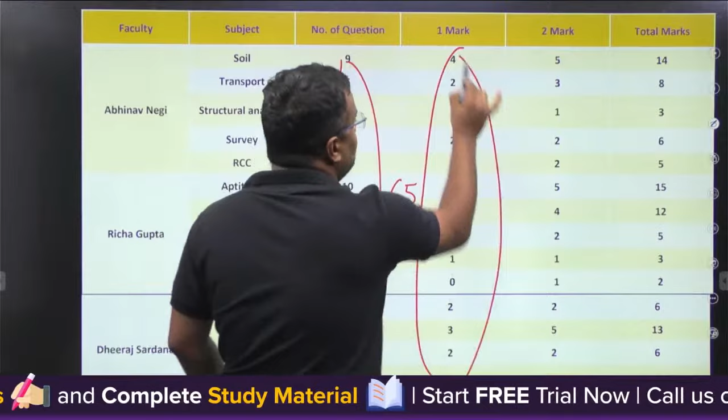Now, coming back to this mock test, guys, total number of questions, if you add, this will be 65 questions. Total number of 1 mark questions, if you add, it will be 30 questions. Total number of 2 marks questions, if you add, there will be 35 questions. And total marks, obviously, will be 100 marks. Aptitude, maths, FM, SOM, irrigation, everything will be there. First, I will be coming, doing soil, transport, structural analysis, survey, RCC. Of course, the weightage of these subjects is exactly the same as that is coming from last many years.

Then Richa will be coming for aptitude, environment, hydrology, irrigation with almost the same weightage as in the GATE examination. And then Dheeraj sir will be coming with strength of materials, mathematics, FM and engineering mechanics. Okay, so guys, be ready with copy and pen and evaluate yourself.

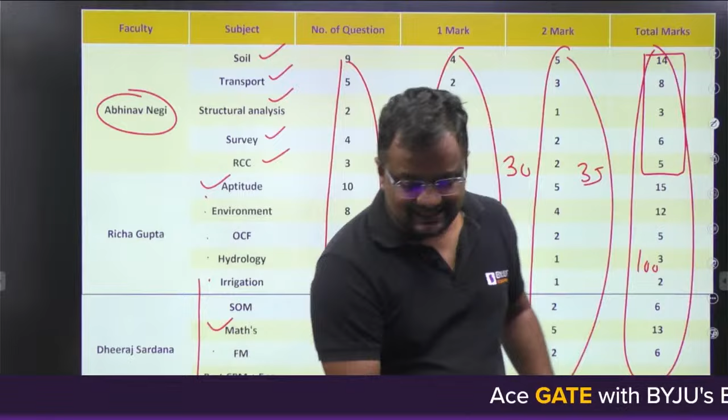Everybody, copy, calculator, pen nikal lena bhai. Copy, calculator, pen nikal lena, so that you can evaluate yourself.

Okay, this is the first question of soil mechanics of 2 marks. First, I'll be taking soil mechanics. I'll be taking total 9 questions, out of which 4 questions of 1 mark and 5 questions of 2 marks. As from last 2 years in GATE examination, 1 mark and 2 marks questions are jumbled up. Earlier in my time, 1 mark questions in a single go, and then 2 marks questions in a single go. But from last 2 years, 1 and 2 marks questions are jumbled up, in the same format I have taken in this test as well.

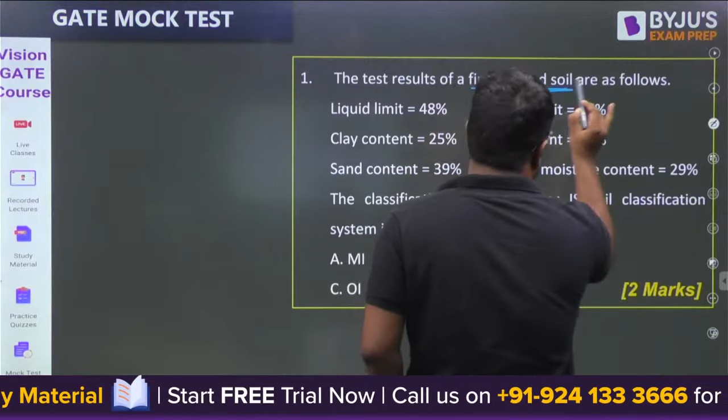There is a fine grained soil. Question number 1, guys. First, I'll be taking soil mechanics. This is a 2 marks question. Nothing is written. It will be MCQ. In actual examination, they will be telling you that this is MSQ, this is MCQ or NAT. Hide and seek they will not be playing.

Now, this is a fine grained soil. That means the answer will be either Cl, Ci, Ch, Ml, Mi or Mh. Answer will be either of these. Evaluate yourself, guys. Okay. Now, from here, we have to find the classification of soil.

Now, what is the liquid limit? It is 48%. So, when liquid limit is less than 35%, even less than 20%, that will be low compressible. Liquid limit from 35 to 50 is intermediate compressible. Liquid limit greater than 50 is high compressible. So here liquid limit is 48%. That is coming in this. So it is intermediate compressible.

So this cannot be the answer. So now two options are there: either the answer will be Mi or Ci. Yes, the option can be Oi also. But for Oi, they have to give some different data like soil is dark in color, or the weight of the soil is significantly lost after removal of water content. That is not written. That means organic will not be there. Then in that case, if the answer comes below the plasticity line, we will take it Mi.

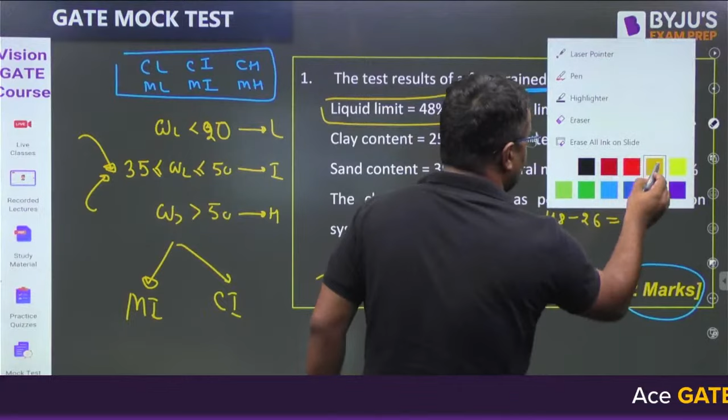Now, what is IP of soil? IP is WL minus WP. It is 48 minus 26%. So that is 22%. 22% means 0.22.

Now there is an A line, as you know. If I make a graph of IP and liquid limit, there is an A line. The equation of A line is IP is equal to 0.73 (WL minus 20). What is liquid limit? 48 minus 20. So this will be 28 into 0.73. What is this value?

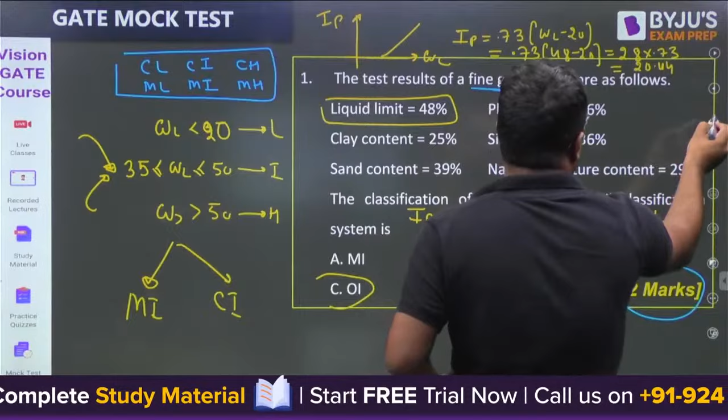What is this value? 28 into 0.73. 20.44. So this value is 20.44.

That means the value on the A line is 20.44, and what is our IP? Our IP is 22%. So our IP is greater than 20.44. So it will be clay. Ci. It will be Ci.

Why is above clay and below silt? Because clay has a higher IP value on the y-axis; clay is more plastic. So that is why the above points are clay and below is silt. Give me yes or no, guys.

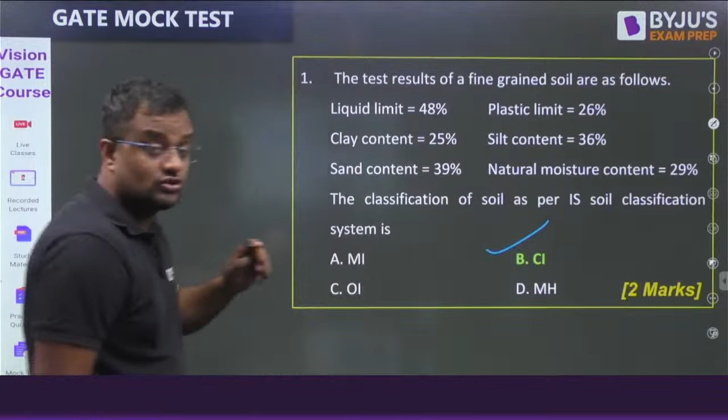One question is done. Okay, in soil, total 9 questions we have to do. The questions will be exactly as per GATE pattern. Okay, now the consistency index.

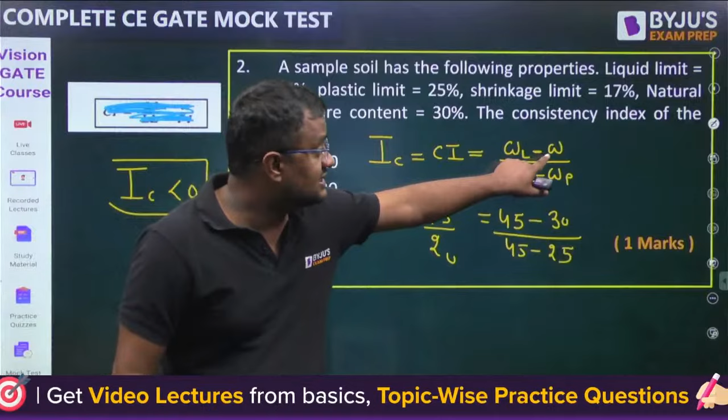Now, what is the significance of consistency index? Suppose somebody reports that IC is less than 0. That means the soil is in a very liquid state, negligible shear strength. Because if IC is less than 0, the numerator is negative, since the denominator can't be negative; WL is always greater than WP. That means W is more than WL. So natural water content is more than liquid limit, the soil is in liquid state, negligible shear strength.

Okay. Chalo, everyone. Question number 3.

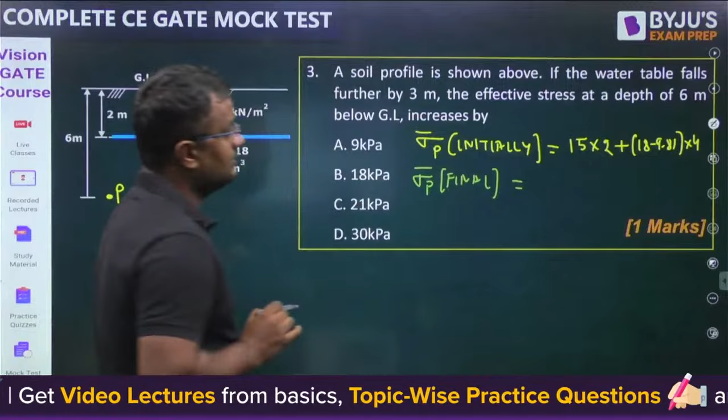Gamma W is not given, na? Gamma W is not given, so we have to take it 9.81. Okay, whenever it is not given, we have to take 9.81. For how much meter? For 4 meters. And sigma bar P final when the water table drops. Okay, when the water table drops further by 3 meter, water table comes here.

Then for 5 meter it is 15. So 15 is not for 2 meters now, 15 is for 5 meters. Okay, and gamma submerged, 18 minus 9.81, for how much? 5 is here, so 1 is left, into 1. What is the difference coming, guys? Everybody. 21 kilopascal to be precise. Approximately this much will be coming. Yes or no? Tell quickly.

Let us go to question number 4, guys. 2 mark question. Come on. I have taken not very tough questions. Whatever the mock tests, whatever the GATE practice sessions I have taken ever, this one is one of the easiest, guys. Come on. So, tell me. Okay, what is the value?

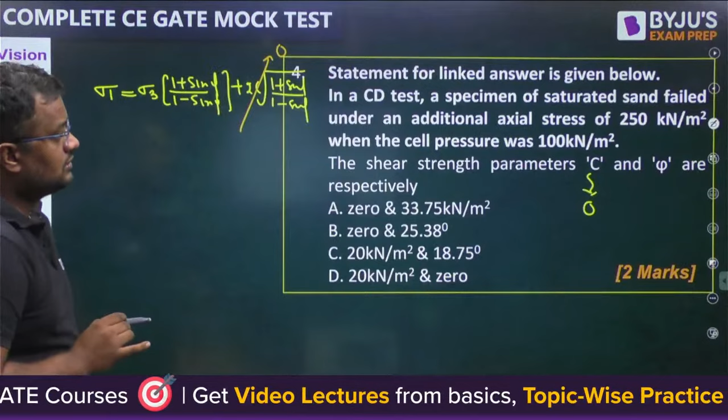Sigma 1 is equal to sigma 3 into (1 plus sin phi)/(1 minus sin phi) plus 2c root of (1 plus sin phi)/(1 minus sin phi). Now, whenever it is written that it is sand and nothing is mentioned, c will be 0. So this is 0. Now, the sigma 1 value is 250 plus 100, that is 350. Sigma 3, the cell pressure, is 100.

One equation, one unknown. You can find the value of phi. So this is 0 and 33.75. Good, Sagar. Excellent. Hydrology? Okay, brother, hydrology, irrigation, all subjects are these?

Now question number 5. They are asking the relative density. The relative density Dr, also called ID or RD, generally the students know this formula: e max minus e upon e max minus e min. Now, gamma d is equal to G gamma w upon 1 plus e. When e is maximum, maximum voids, gamma d is minimum.

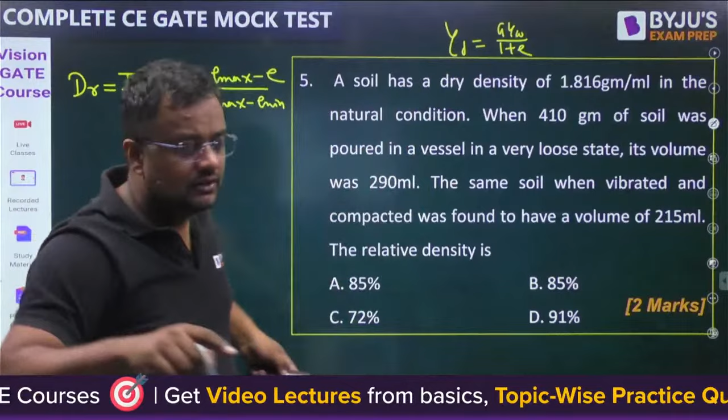So if you find e from here, e is G gamma w upon gamma d, minus 1. When e is maximum, gamma d is minimum. So minus 1 will be cancelled out, and G gamma w will cancel out. So when it is maximum void ratio, dry density is minimum: 1 upon gamma d minimum. And when there is minimum void ratio, gamma d is maximum. This is relative density.

Now let us find out the value of gamma d. So soil has a dry density, this gamma d is obviously 1.816. In the loosest state, that means gamma d minimum, the weight is 410 by volume 290. And gamma d maximum in the densest state, compacted, weight will be same, 410 by 215.

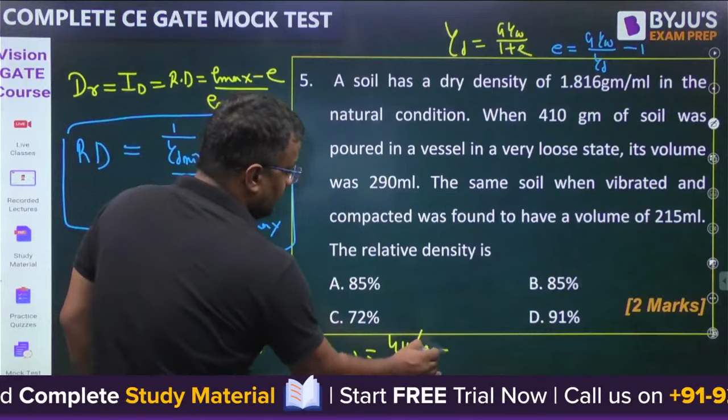Now you know all the values. So putting all these values here, what you are getting, can you please let me know in the comment section, guys? From putting all these values, you are getting A, 85%.

And what is the physical meaning of relative density? e max minus e natural upon e max minus e min. If e is less, relative density is more. That means if a soil has a larger relative density, it is densely packed, voids are less.

Okay, let us do question number 6. Come on. Again, one more question of fine grains, one more question of soil classification, guys. Come on, give a try, everyone.

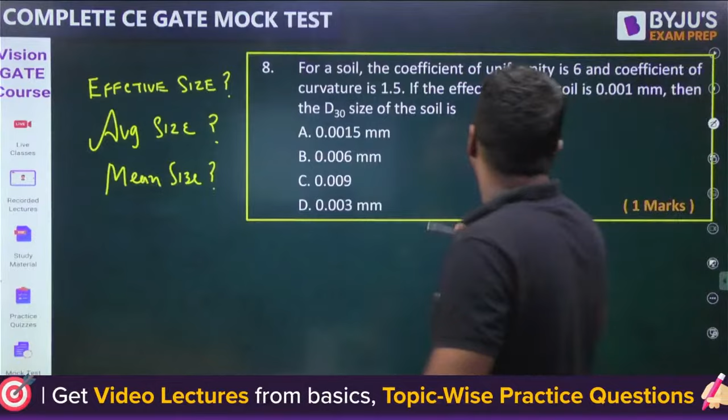Okay, CU is 6, is equal to D60 by D10, and the value of CC is equal to 1.5, is equal to D30 square upon D60 into D10. Two equations, two unknowns. Okay, from 1 and 2. No, not two unknowns.

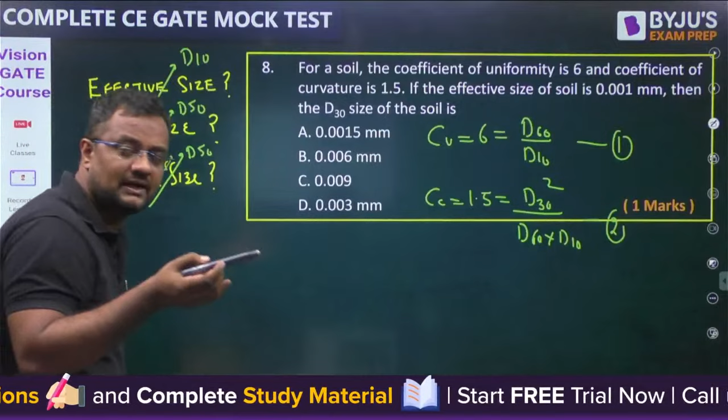Effective size is D10. Average size, if somebody has written it, is D50. And mean size is also D50. D10 means the diameter below which 10% of particles are there. D50 means the diameter below which 50% of particles are there. So D10 is known, 0.001. So from here, two equations and two unknowns. We can find D60 and D30 from here.

Yes Sagar, C is not coming, yes, 0.003 is coming. Sagar, please check your calculations. Okay. Ninth question of 2 marks.

Two samples of normally consolidated clay, NCC. Are you remembering something from NCC? Not the NCC cadet, related to soil only. What is NCC? For NCC, it behaves like a sand. C is negligible, so we take C equal to 0.

Okay, so the common tangent is going from the origin. Now, sigma 1 is equal to sigma 3 into (1 plus sin phi)/(1 minus sin phi) plus 0; that term will be 0. Let me write that equation for this orange Mohr circle. For the orange Mohr circle, this is 12, this is 7, (1 plus sin phi)/(1 minus sin phi). Find phi from here. One equation, one unknown. Then apply that phi for the green Mohr circle.

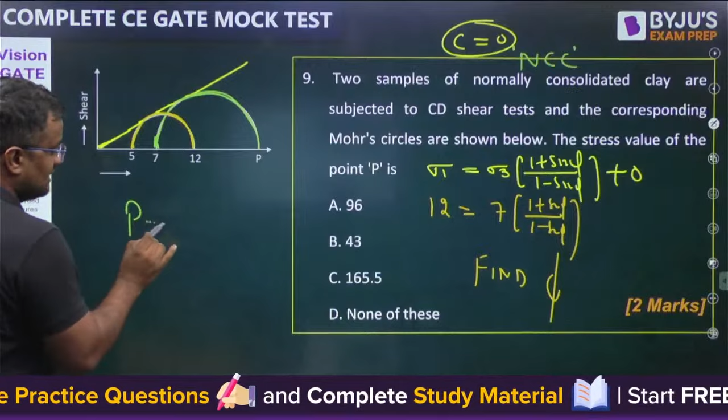For the green Mohr circle, sigma 1 is P. This is 7. No, sigma 1 is 12 and that is 5 for that. Now here P is equal to 7 into (1 plus sin phi)/(1 minus sin phi). Put phi here and find P. Have you understood? I guess none of these will be coming.

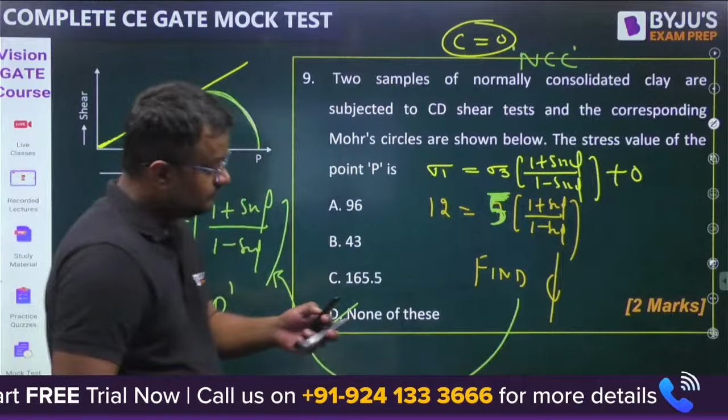Okay, guys. So these were the questions of soil mechanics. Now let us move. Then Richa ma'am will be coming, Dheeraj sir will be coming. Let us move to the next subject, that is surveying. In surveying, we'll be doing 1 question of 2 marks and 2 questions. Okay, let us go there.

Chalo. Tell me. Evaluate yourself, guys. Quickly. Okay, the magnetic bearing is 178 degrees, but at noon the true bearing is 180 degrees. And the magnetic bearing is 178 degrees. Therefore, clearly, declination is 2 degrees east. You are measuring from east, only then will you be measuring less.

So now the magnetic bearing is 72 degrees 40 minutes. So you are measuring the magnetic bearing less, right? Suppose you don't know the declination, you don't know local attraction, nothing.

Now I'm giving the answer without using the word declination. True bearing is 180, you are measuring 178 degrees. So you are measuring 2 degrees less. Now the magnetic bearing is 72 degrees 40 minutes. So the magnetic bearing is 2 degrees less, na? So this is also 2 degrees less. So the real value will be 74 degrees 40 minutes. This simple, without using the word declination, I have solved.

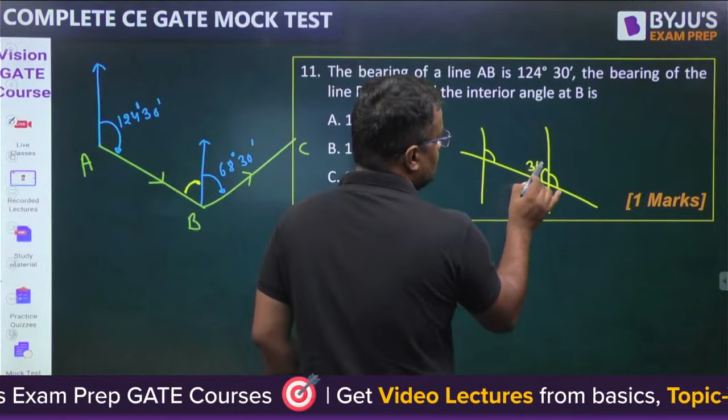Guys, what will be this angle? This yellow angle? 180 minus this? Come on, yaar. If two lines are parallel, this is 150, this is 30, so the sum of these two is 180. So this angle should be the supplement from 180. So subtract 124 from 180: 55 degrees 30 minutes. 55 degrees 30 minutes. Give me yes or no.

Now the interior angle asked is this angle. So 55 plus 68. 60 plus 50, 110. 110 and 118. 123, 124. 124 degrees. C option.

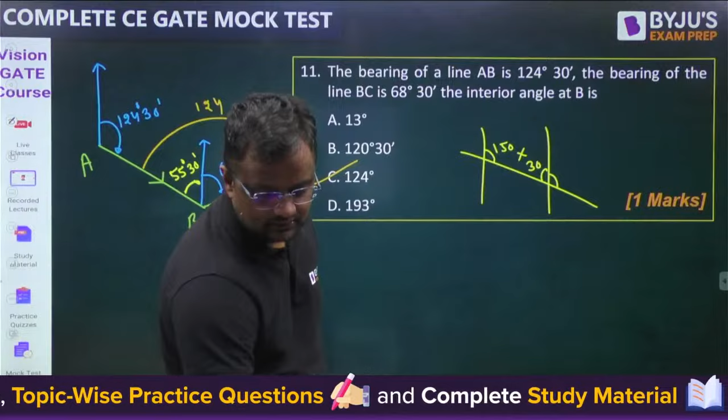Okay. Now the 12th question. This is an MSQ, guys. Keep in mind this is an MSQ. Now, suppose here is a river in between. So we cannot put the leveling instrument in the middle of backsight and foresight. So this is point A. Data is not given, so I am giving you the data in terms of a figure. Don't worry.

Please see. When the instrument was near A, the reading here is 1.625 and the reading here is 2.545. This is X1 and this is Y1. Now, when the instrument is near B, the reading is 1.405, that is Y2, and here it is 0.725. This is X2. So 1.625, 2.545, and when it is here, 1.405 and 0.725.

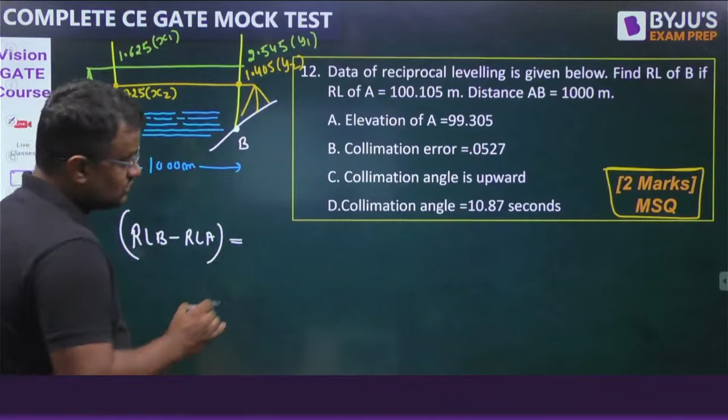Now, the distance between them is 1000. Guys, from this one question, all concepts of reciprocal leveling will be cleared. Now, RLB minus RLA is equal to (X1 minus Y1 plus X2 minus Y2) by 2. What is the RL of A? 100.105. X1, X2, Y1, Y2 are given. From here, RLB is exactly 99.305 meter. So option A is correct. Now let me move to option B.

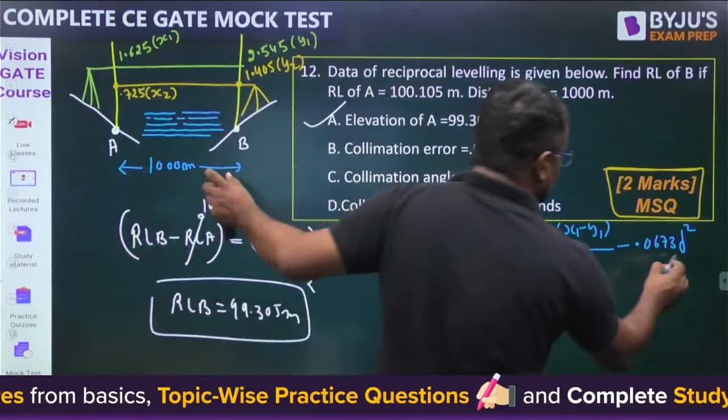What is the error due to collimation? I am not going into derivation. This is (X2 minus Y2 minus (X1 minus Y1)) by 2 minus 0.0673 D square. D is in kilometers, so 1000 meter means D is equal to 1. From here the error of collimation you get is 0.0527, positive. And error due to collimation positive means upward.

Why upward? Let me tell you. Suppose this is the instrument, this is the staff, this is the true value, and you are measuring above. Collimation error is above, so you are measuring more. Error is measured value minus true value, so this is positive. Whenever it comes positive, it's upward collimation error. Whenever this value comes negative, it is downward collimation error.

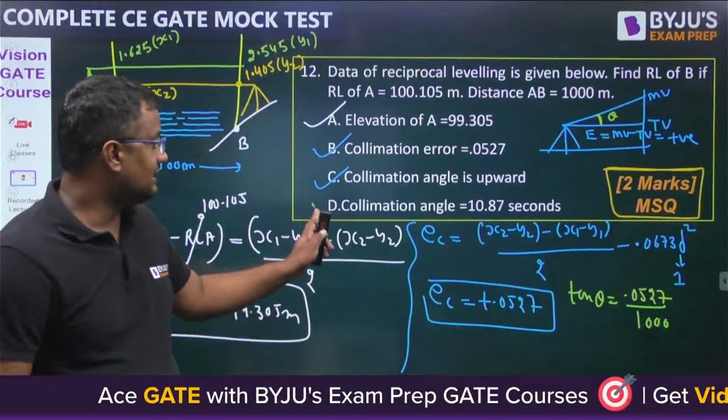So the collimation angle is 10.87 seconds. Let me check this. This theta: tan theta is equal to perpendicular by base. This error, 0.0527 divided by 1000. So theta is 10.87 seconds. So with a single question, guys, we have solved the complete collimation error, all the parts of reciprocal leveling that could come. Got it? Now after this, do this.

Let's do a question based on omitted measurement. What is the latitude of AB? It is L cos theta, and when values are in whole circle bearing, positive negative takes care of itself automatically. So it is 30 into cos 60.5 degree.

What is the departure of AB? It is 30 into sine 60.5 degree. Moving forward, latitude of BC is equal to 120 into cos 300. What is the departure of BC? It is 120 into sine 300.

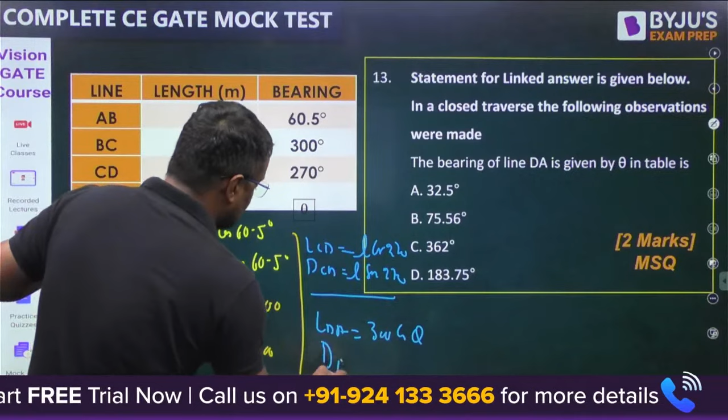Similarly, what is the latitude of CD? It is 120, L cos 270. What is the departure of CD? It is L sine 270. Similarly, what is the latitude of DA? It is equal to 300 cos theta. And what is the departure of DA? It is equal to 300 into sine theta.

Now, as from A we are coming back again to A, summation latitude is 0 and summation departure is 0. Two equations, two unknowns, L and theta. From here the value you get is for theta, and length also you can check - length is equal to 212.7. You can verify it later. Got it, everyone? Please tell me.

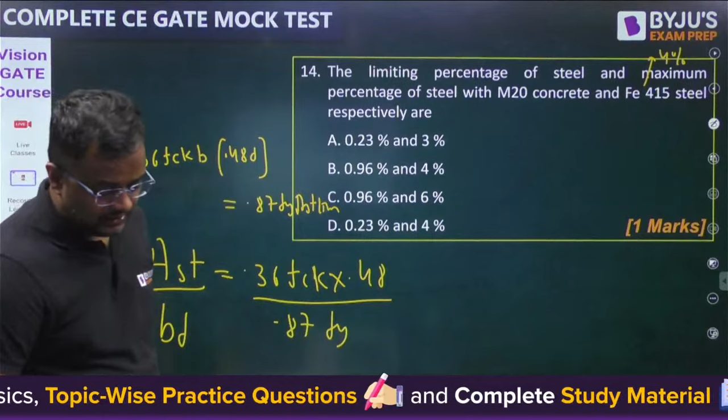Got it everyone? Okay, now question 15, which is MSQ. Which of the following statements are true for an over-reinforced beam? It is a primary compression failure - when steel is provided too much in tension, why would tension failure occur? It will fail from the compression side because in tension we have provided a lot of reinforcement.

These have large curvature compared to under-reinforced sections. This generally occurs, particularly if you see the formula of working stress method, it can take a large bending moment - why would large curvature come otherwise? Now it can take more - this is not failing from the tension side, right? It can take more bending moment.

Yes, according to WSM, the moment of resistance of under-reinforced is less than the moment of resistance of balanced section, then the moment of resistance for over-reinforced section will be the highest. Being subjected to brittle and sudden failure, not recommended - yes, as per IS 456, brittle failure should not be there. So options A, C, D we have already covered.

Question number 16, chalo batao - tell me quickly. What is the MU limiting formula? MU limiting formula is 0.138 FCK into BD square. 0.138 into FCK is 15, BD square is 200 into 300 square, that will be 37.26.

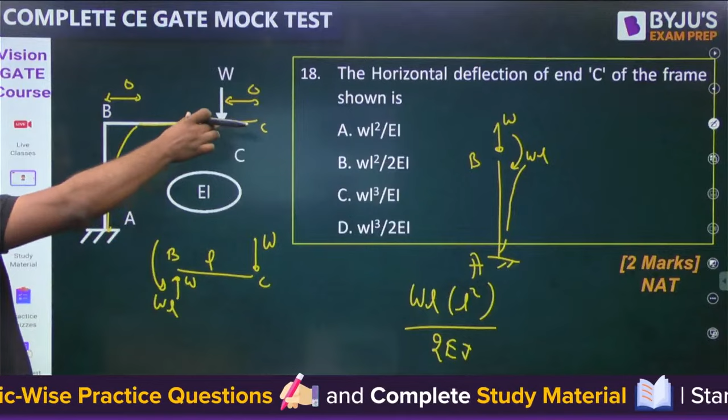So M into L square by 2EI, and whatever AB will be going here, the same amount BC will be going here - if this amount is delta, then this will also be going by delta amount here. अगर यहां पे theta एक और आता तो हम theta into L भी add करते उसमें, but here theta is 0. So from here WL and WL cube by 2EI, WL cube by 2EI.

Okay, now guys let us move to the next, jल्दी से बता दो.

Okay, the average headway is 3 seconds - the longitudinal distance, if the distance between the two vehicles in terms of time is 3 seconds, then what is the distance between them in terms of space? That is 80 into 5 by 18 into 3. If at one section one vehicle is going and another vehicle is coming after 3 seconds, then the distance between them is 80 into 5 by 18 into 3. What is the value? जल्दी से बता दो.

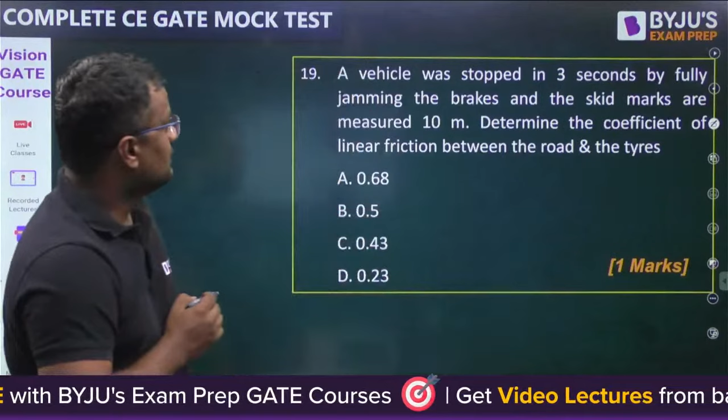19वें में coefficient of friction बताना है, द skid marks आपके पास दे रखे हैं. A vehicle was stopped in 3 seconds by fully jamming a brake and skid marks was this. So guys, you know this, v square minus u square is equal to 2as. Fully stopped, so finally 0. So u square you have to find out, initial speed is not known, a is known. So u square is equal to a is minus mu g into the distance, skid mark is 10 meter.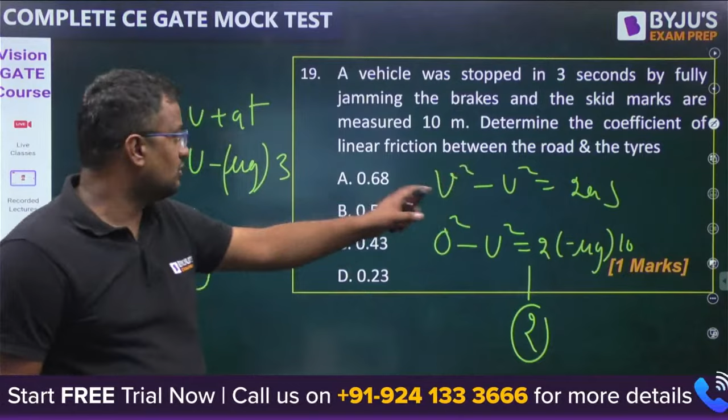And one more formula, v is equal to u plus at. So for v is equal to 0, u is equal to initial speed we don't know, a is minus mu g into time, time is how much? 3 seconds. So two equations, two unknowns - one equation is mu, u initial speed and mu is unknown, and second equation is this. Two equations, two unknowns you can find out. Otherwise वो फॉर्मूला भी होता है, यहां से u निकाल के वहां रख दो तो ये फॉर्मूला भी आता है, जो भी आपके पास आता है derive में कर सकता हूं, उसमें जा नहीं रहा अभी.

ओके 21 जल्दी से बता दो. 21 में आपके पास एक vehicle ऐसे है, उसका speed कुछ दे रखा है और उसको दूसरी vehicle को overtake करना है on a 2-lane unidirectional highway with design speed 60 km per hour, with the acceleration of 3.6 wants to overtake a slow moving vehicle. इसका 40 है, इसका 60 है, तो OSD हो जाएगा D1 plus D2 plus D3, but D3 will be 0 because D3 is the distance of the vehicle which is coming from opposite end. Okay, so that will be D1 plus D2 because these are 2-lane unidirectional, unidirectional means D3 will be 0.

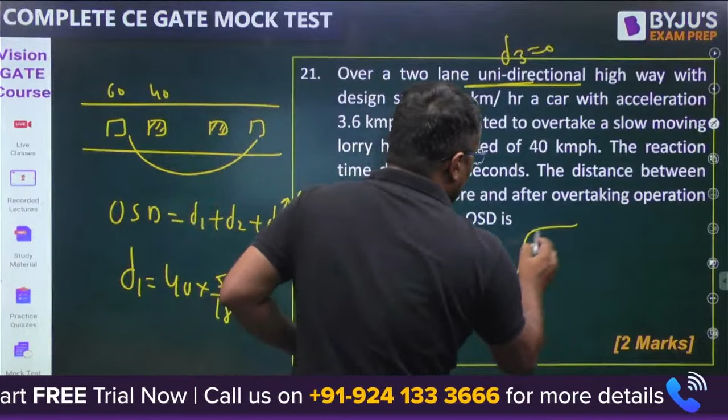ओके, सो D1 कितना होगा? हम मानते हैं कि 2 सेकंड तक वो overtake ही नहीं कर रहा है, उसी की speed चल रहा है - 40 into 5/18 into 2 seconds, 2 seconds तक वो देख रहा है overtake करूं ना करूं, 2 seconds हमको मानना ही मानना होता है. और D2 तब होता है जब वो accelerate करके यहां आ जाता है - या तो उसकी speed 20 into t plus 2s निकाल लो, otherwise अगर formula से चलना है तो 4s/a करो. ओके, s कितना है? 4 into 20 by a.

4 into 20 by a, what is acceleration? कहां गया? 4 into 20. अच्छा, acceleration ये दे रखा है 3.6 किलोमीटर पर सेकेंड, उसको आप units में निकाल लोगे तो वहां से आपके पास जो t की value मैंने घर पे निकाली थी that was 8.94. Okay, that was 8.94. Now what will be d2?

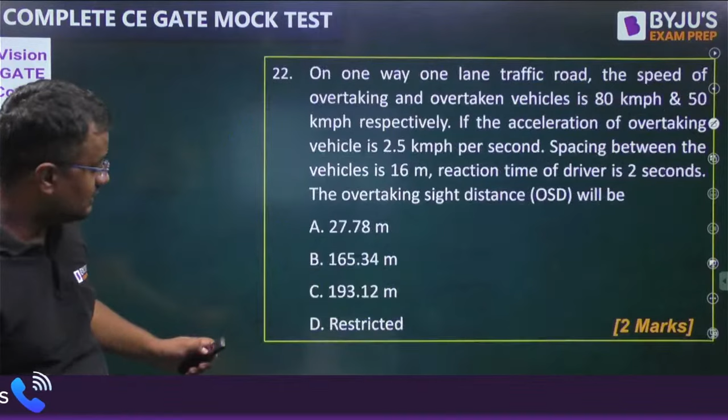ut plus half at square. U is 40 into 5/18 initial speed - before overtaking that was the speed running. T is 8.94 plus half acceleration into t square. When you add, you will get the answer as 161.10.

Okay, now this question, guys, I have not taken the same OSD question if you are thinking. Here the answer will be restricted. This is a one way, one lane traffic question - this is a new question that I have made myself. So in one lane traffic, how will overtaking be allowed? That is restricted there.

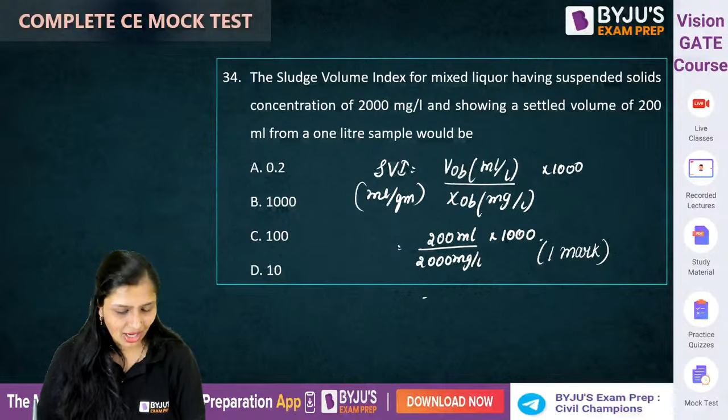So how much volume is settled? 200 ml. How much was the concentration of the solids? 2000 mg per liter. So converting mg into grams, divided by 1000. So how much will it be coming? 100. Correct. Got that. Now, question number 35.

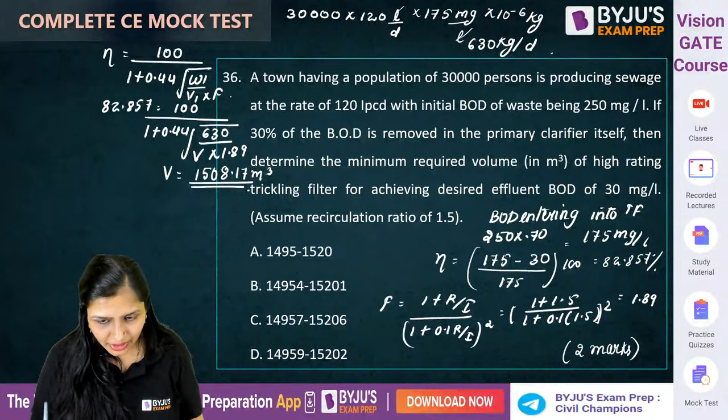Check it out. Every other is 4 digits, 5 digits. It will fall in the range of A, 1495 to 1520. It falls in this range. Got it? Now, question number 37. It is an MSQ. Come on, guys, solve it. I am not going to tell you this one. Quickly. Come on.

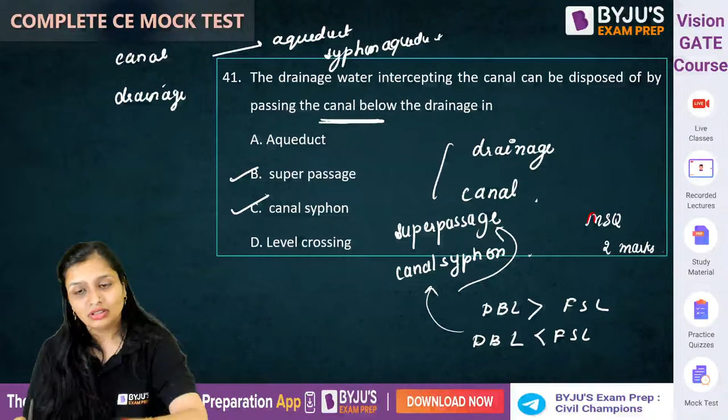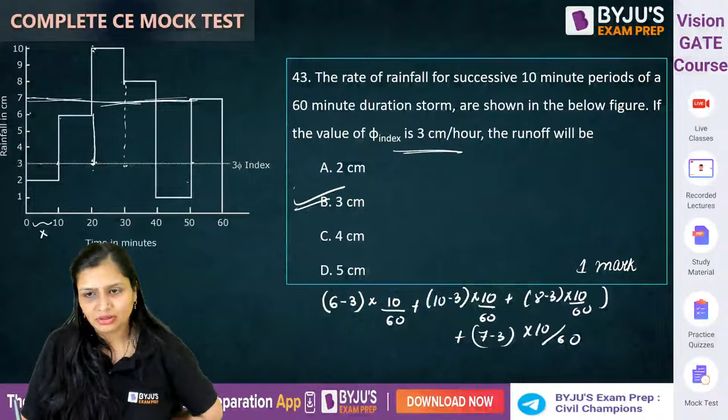चलो, this question, this is a 1 marks MCQ question. इसको ना यहाँ से बनाना थोड़ा ठीक रहता, बट ठीक है. चलो छोड़ो. This one.

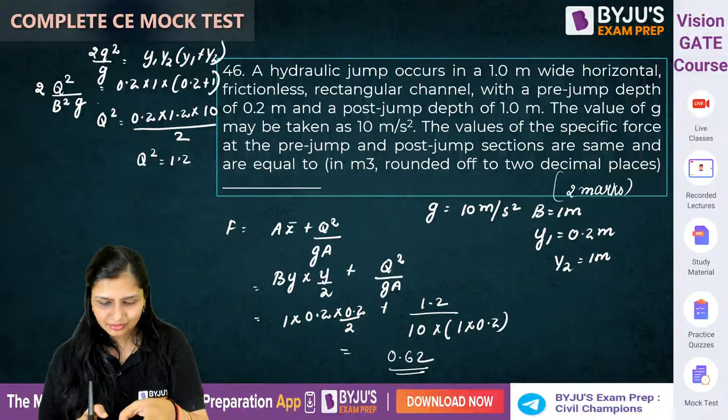Quickly solve this. 0.62. Okay, sir, आप ready है ना? Okay. Point 0.62. Got that? So with this we complete open channel flow, hydrology, irrigation, environment with you guys. And I guess you have got maximum questions correct.

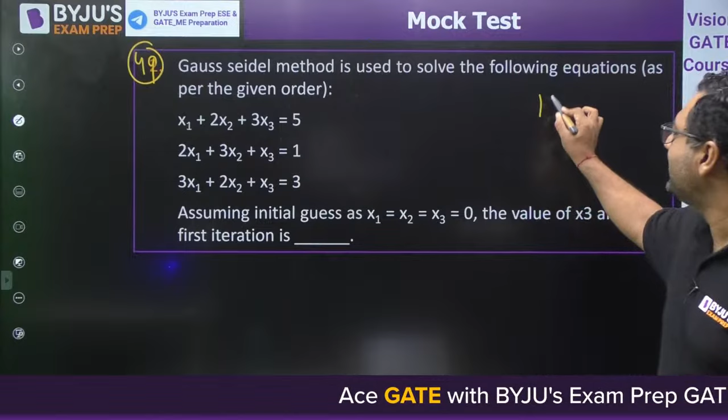So next question is, guys, question number 49. For this question, my dear, this is also a 1 mark question, and this is a numerical answer type. Okay, so 1 mark NAT question is in front of you. This is question number 49. I'm going to solve till 65, and I'm having all mathematics questions, engineering mechanics, PERT-CPM. Okay, so one by one we will see that. Tell me the answer for this question, guys.

This is easy one. Gauss-Seidel method is used to solve the following equations as per the given order: x1 plus 2x2 plus 3x3 is 5. 2x1 plus 3x2 plus x3 is 1. 3x1 plus 2x2 plus x3 is 3. Assuming initial guess as x1 equals x2 equals x3 equals 0, the value of x3 after the first iteration is. So guys, try to solve it.

Otherwise, I am here to help you. If you are feeling any problem, don't worry, I am going to give you the solution. Don't worry about that. Tell me the answer, guys.

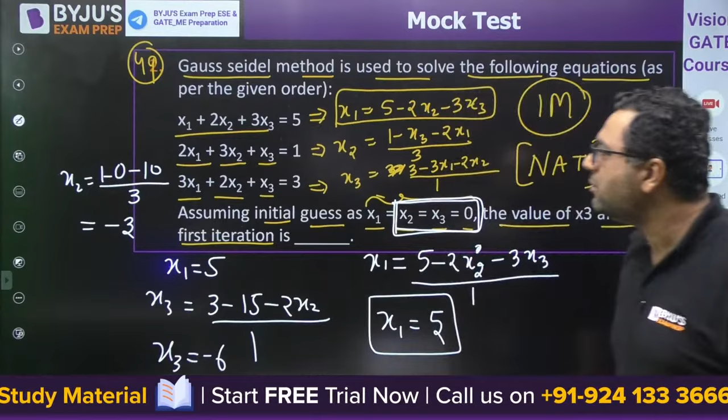Yes Vineet, your answer is correct. So we are going iteration wise: X1 will give you x2, x2 will give you x3, and likewise we will move on. The first iteration value will always be given to us.

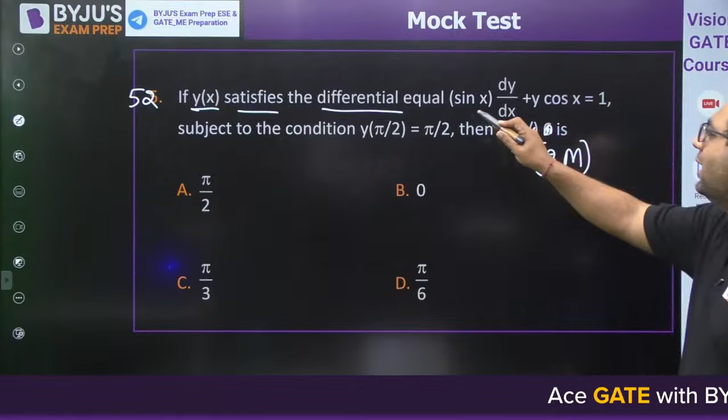And this question is saying y of x satisfies the differential equation, that is sin x dy by dx plus y cos x equals to 1. Then it is saying, subjected to the condition y of pi by 2 equals to pi by 2, then y of pi by 6 will be equals to.

This is a wonderful question. Let us solve it, guys. I am expecting the answer from your side. Just solve it, this is a 2 mark question, question number 52.

And after that, we are having 13 more questions. So just solve it, guys.

Yes, Vineet, what would be the answer for this?

Fine, so guys, just for 1 second the video will be stopped, buffer, don't worry. Yes, Vineet, am I properly audible and visible? So what is the answer according to you? Are you saying B for this question? We will solve it, don't worry.

So guys, this question is actually question number 53. The question is saying sin x dy by dx, plus y cos x is equals to 1. Okay, I feel we move ahead. Question number 53, just let me solve it.

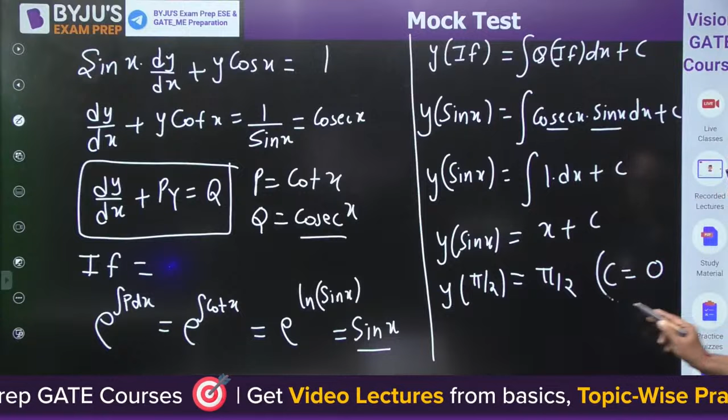Yes. So we will be getting pi by 3. C would be the right answer for this. Once we put y of pi by 2 is pi by 2, you get c to be 0. Putting c to be 0 here, you can find it out. They have mentioned that y of x satisfies this differential equation, y of pi by 2 is this, and you need to find out y of pi by 6. Very good. The answer is pi by 3, that is correct.

One more question we have left behind is this one, an engineering mechanics question. That's why I changed the PPT. By mistake, the wrong PPT was opened. That's why in between I stopped the session.

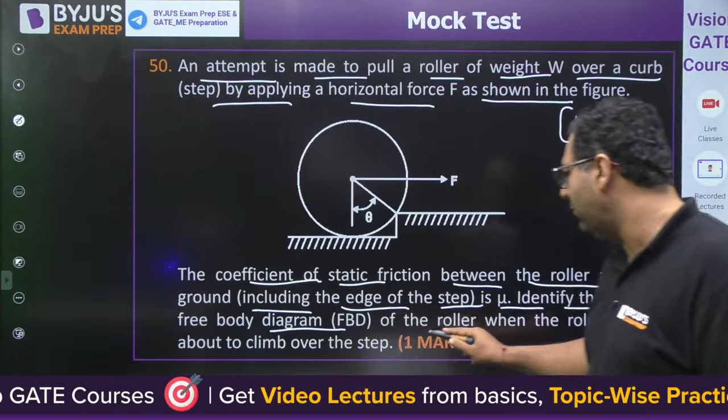An attempt is made to pull a roller of weight W over a curb by applying a horizontal force F as shown in the figure. This is a 1 mark question from engineering mechanics. The coefficient of static friction between the roller and the ground, including the edge of the step, is mu. Identify the correct free body diagram of the roller when the roller is just about to climb over the step.

So my dear, these are the options in front of you. Vineet, which is the correct free body diagram? This is the case when this body is just about to move, just about to cross the step. At that time they are asking you. What would be the right answer? Tell me that.

What would be the right answer?

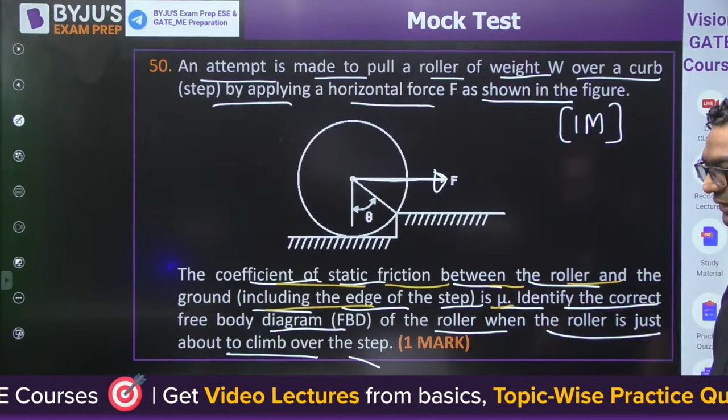As they have given this, my dear, the correct answer will be D, because you will have a friction here and a normal force here. This would be F, this would be W, but there would not be any force at this point. That's why only D is correct. All other options are not correct. Is it clear for everyone? So this is how you will be solving this question.

Moving further to the next question, guys. This is going to be question number 52. We have done it. 53 we have done it. 54, this is once again from probability. And this question is for 2 marks, because I already told you we have the complete 100 marks paper, 65 questions. Now what about this question?

As per the past record of India and Pakistan cricket matches, the winning ratio is 5:2. Find out the odds in favor of India's victory. You have just seen a match of India-Pakistan, India-Sri Lanka, so this is based on that. They are asking you the odds in favor of India. So odds in favor of India is the probability of win of India divided by 1 minus the probability of win of India. This type of question we have done last Sunday also.

You know that out of 7 times India is winning 5 times. So the probability of win of India is 5/7, and the answer will be 5/2. So what would be the answer? B would be the right answer. You can also say this is the probability of win divided by the probability of loss. Is it clear? So the answer will be B. Very good, Vineet. Moving to the next question.

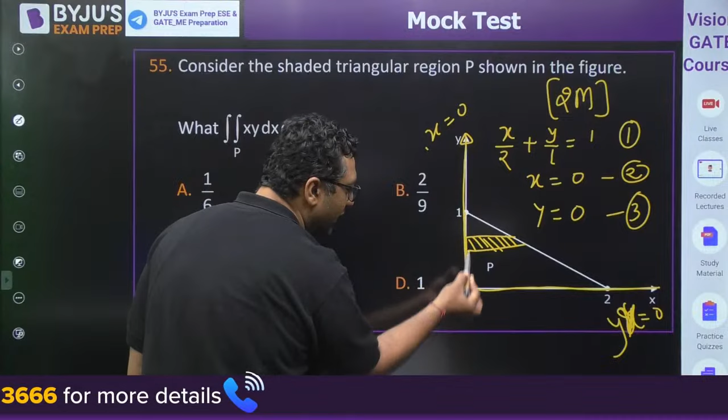Now you can try. You need to take a horizontal strip actually to find out the integration, and that strip you can see. This is moving from where? In x direction it is moving from this line to this line. So this strip is having a limit of from this to this. I feel this idea will be enough. Try to solve it. Yes, try to solve it. This is a good one.

Okay, you have already calculated and you are saying the answer to be 1 by 6. Let me check it because I don't remember the answers of the question. Yes, 1 by 6 is correct, my dear. So my dear, this equation I have already given you: x by 2 plus y by 1 is equals to 1. We will multiply this with 2: x plus 2y is equals to 2.

What is x? 1 minus 2y. So my dear, if you see, this is x is equals to 1 minus 2y. This equation is x is equals to 0. If you see this strip, you know that we got the limit of one integration. So the limit of one integration will be going from 0 to 1 minus 2y.

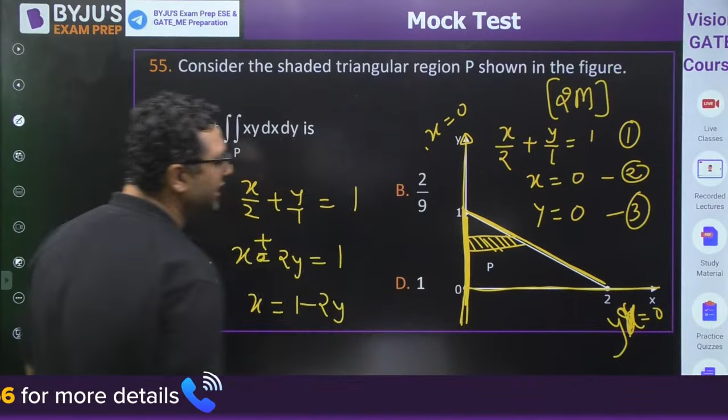Vineet, what would be the limit to the second integration? Yes, can you tell me? Yes, this is the figure. You know that y is varying from 0 to 1. So second will be 0 to 1. And then my dear, you would be writing this as x into y dx dy.

Is it clear? So when you will be solving this equation, we are having two limits. First of all, you will do the first integration, then the second integration, and you will get the answer as 1 by 6. So it is very easy. I have given you the complete solution. Moving to the next question, guys.

This is from matrix, and once again the weightage of this question is 2 marks. So guys, this is from the system of linear equations. You can see this is equation number 1, equation number 2, equation number 3, and they are asking whether this system has unique solution, no solution, infinite number of solutions, or 5 solutions. So what would be the answer? Try to solve it, guys. After this, we will be starting the strength of material questions, then fluid mechanics. We have total 65, we are at 56, so 9 questions are left.

Tell me, guys, what would be the answer? So Vineet, you are doing really well. I am happy with that. Solve this question. Unique solution, no solution, infinitely many solutions, or 5 solutions. Solve it.

So you would be having the matrix 2, 1, 1, 0, 1, minus 1, 1, 1, 0. This is the matrix A we got. Now you need to find out the determinant of A. If you find out the determinant of A, can you tell me what you will get? Tell me.

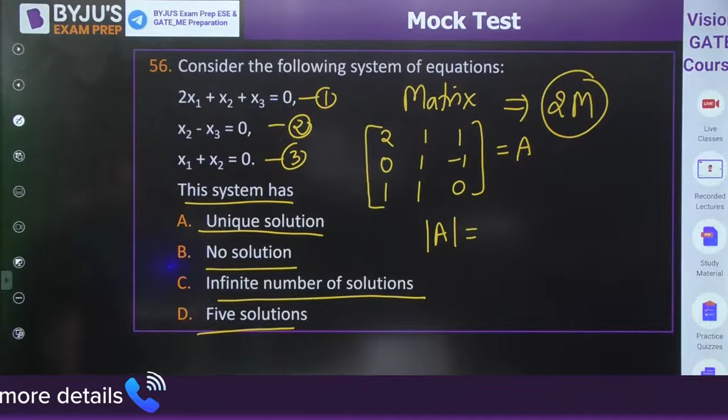If you find out determinant of A, it will be 2 into 0 minus of minus 1, then it is minus 1 into 0 minus of minus 1, then you will be having 1 into 0 minus 1. So can you tell me what you will be getting as the answer for this? Okay, very good. So you would be getting determinant of A to be 0. It means the rank of matrix A is going to be 2.

You can see if rank is less than the number of variables, the solution will be infinitely many. So C is the right answer for that.

Very good, Vineet. Wonderful, dear. I am happy with your performance. Just continue that. You will be doing wonders in GATE.

This is once again a 2 marks probability question, my dear. And this question is question number 57. We are left with 8 more questions. Okay. So the probability that a screw manufactured by a company is defective is 0.1. So probability of defective part is 0.1. The company sells screws in packets containing 5 screws and gives a guarantee of replacement if 1 or more screws in the packet are found to be defective. The probability that a packet would have to be replaced is?

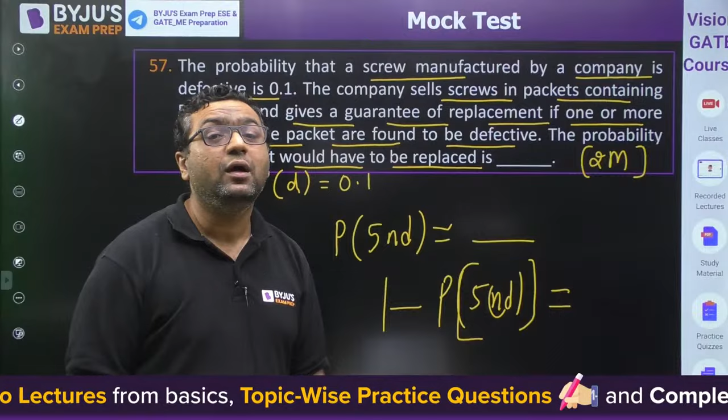So the packet would be replaced if you have any one piece defective. So you can also find out the probability of all 5 non-defective, and whatever you get, you just need to subtract that. Because if all 5 are non-defective, only in that case you need not replace anything. If you get even one defective piece, you need to replace. So that is why 1 minus 5 non-defective will give you the probability of at least 1 defective. Okay. So try to solve it, guys.

Try to solve it. You know that if the probability of defective is 0.1, then probability of non-defective is 0.9. So probability of 5 non-defective will be 0.9 to the power 5. Okay. So if you get this value, you can very easily find out this. What is the answer? This question is not an MCQ. This is a NAT of 2 marks. These mathematics questions are wonderful.

Okay, Vineet is saying 0.41 and the right answer is 0.409. Okay, you need to go till 3 decimal places. So the answer is correct, but you need to go till 3 decimal places. Moving to the next question, guys. Next, strength of material has started. Now we have strength of material questions. This is the first strength of material question, my dear.

You can see this is a rigid frame on which there is a shaft, on which there is a lever. In this lever, one P is acting like this, the other P is acting like this. And this is length L, this is length L. So my dear, these two equal and opposite forces separated by a distance will create a couple. So to make it very simple, this is the rigid frame, this is the shaft. You can replace this by a torque, and this torque will be equal to P into 2L. So that is the question. And what they are asking, I am showing you now.

They are asking: a rigid horizontal rod of length 2L is fixed to a circular cylinder of radius R as shown in the figure. Vertical forces of magnitude P are applied at the ends as shown in the figure. The shear modulus for the cylinder is G. Young's modulus is E. The vertical deflection at point A? So if you want to find the vertical deflection, I will give you a hint. The outer circumference of this shaft is going to rotate by some angle theta because of the torque.

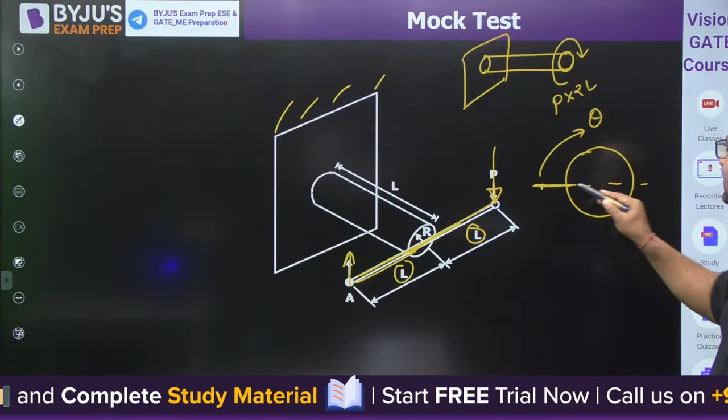So point A is here on this line. When this rotates by an angle theta, you can see the length from the center is L. So my dear, the deflection will be L into theta. So that is what you need to find out. My hint is theta is TL by GJ. Solve it and get the answer. Very easy question. It is from strength of material.

Question number 58, guys. Question number 58. Tell me, guys.

Yes, I am once again showing you the final figure with solution. This was a twisting moment acting, which is equal to P into 2L. And A was a point here. It is rotating by an angle theta. This is the deflection of A, which is going to be theta into L. Okay, theta is TL by GJ. If you see the figure again, the length of the shaft is also L. Solve it and get the answer.

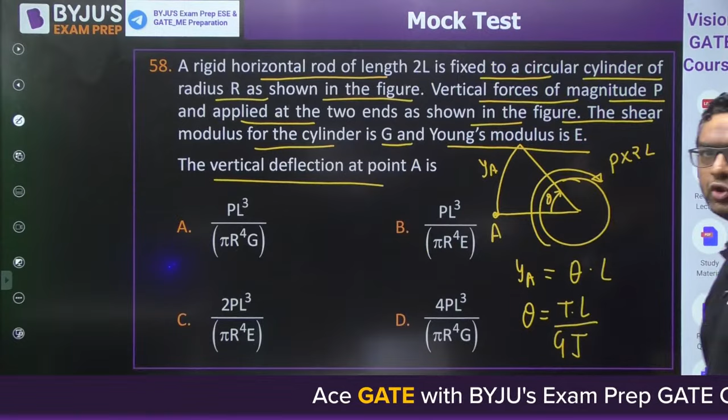Vineet is saying the answer is D, which is the correct answer. D is right. So my dear, when you put in the value of T, theta you will get as TL by GJ, that is going to be 2PL into L by GJ. Okay, that will be the value of theta.

Then my dear, when you solve it, the answer will come out to be 4PL cube by pi R^4 G. Why is it pi R^4 G? Because you know that J is pi by 32 D to the power 4. Okay, so you can put that value and you will get the answer to be D. Wonderful guys. Moving to the next question.

This is also from strength of material. I hope everybody would be finding out Poisson ratio correctly. A square plate of dimension L cross L is subjected to a uniform pressure load of 250 MPa. Okay, so guys, this is a question from strength of material, and if you ask me the weightage of this question, my dear, this question is going to be for 2 marks. The previous one was a 1 mark question. This is a 2 mark question. Solve it.

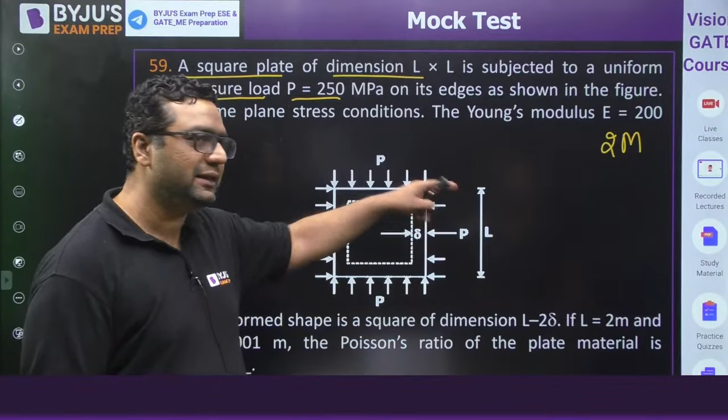Solve it, guys. This is an element given. P is the pressure acting in both the directions. L is the length on both the sides. You need to find out the Poisson ratio value. And this is a numerical answer type question for 2 marks. And guys, they have mentioned that the deformed shape is a square of dimension L minus 2 delta. So you can see 2 delta is going to be the deflection in both the directions.

So first of all you can find out the strain in Y direction, as delta L by L. What is delta L? Delta L is nothing but 2 delta. It will be 2 delta upon L. Delta value is given to you, L value is given to you. This will be the strain in Y. You can also write it as sigma y by E minus mu times sigma x by E. As it is a plane stress condition, you will have sigma z equal to 0. So no need to write that factor.

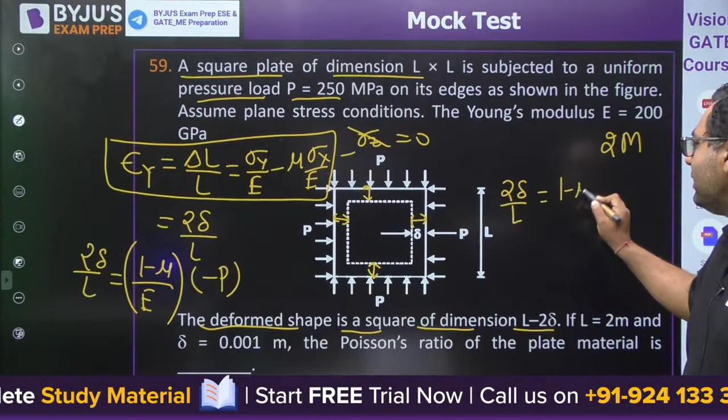So you can just equate these two things. My dear, 2 delta upon L equals, since sigma x and sigma y are equal, 1 minus mu divided by E into sigma x. Sigma x is minus P, because compressive pressure is acting. You will get the value of Poisson ratio by putting in all these values. So 2 delta by L is equal to 1 minus mu upon E into minus P. That is what you need to do, and you will get the value of Poisson ratio. If you have any doubt, you can ask me, then we will move further.

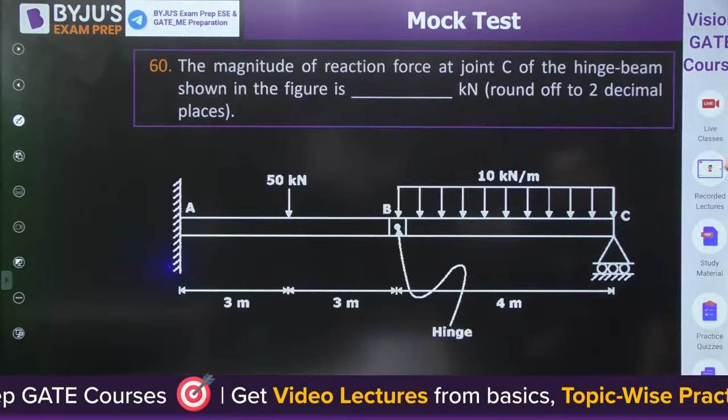This is a 2 mark problem. Next question is a 1 mark problem, again a simple one. Okay, Vineet is saying the answer is 0.23. So dear, I have already calculated the answer for you. Let me check whether it is correct or not. So the answer for this is, where is it? 0.23 is correct. Very good. So Vineet, you are doing really nice. If you do the same in the GATE exam, you are going to get whatever you want.

Next question, my dear, is the magnitude of reaction force at joint C. You need to find out the reaction force at joint B. This is the case of a compound beam, and this is a 1 mark question, as it is an easy one for GATE. So my dear, I feel you all are aware that in these cases we divide the beam into 2 parts. This is one part of the beam. This is the other part of the beam. The other part has C, so here the reaction is RC.

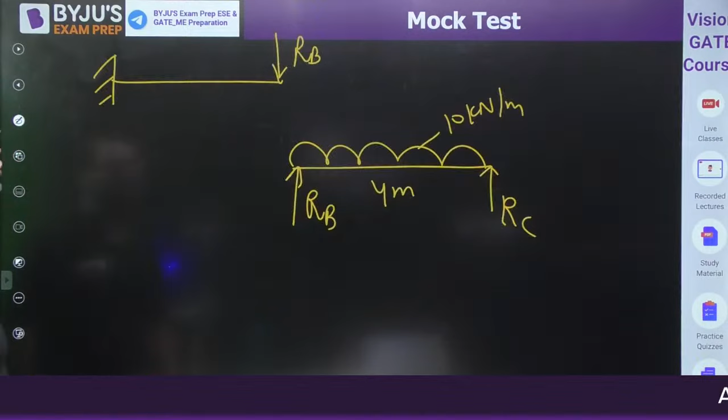We have a UDL here for 4 meters, which is 10 kilonewton per meter. You will assume some reaction RB coming here, and as there is nothing at B, we will make the same RB here as well. And in this case it is also 3 meters, with some 50 kilonewton in between. But we need to find out RB, and for that this part alone is enough. I feel you can answer me very easily. What would be the value of RB? This is a 1 mark question, a very easy question. Tell me the answer.

Tell me the answer for this. Vineet, you need to find out reaction at RB. It's a compound beam, and we divide the compound beam into two parts whenever we want to find out the reactions. By symmetry, you can see the answer is 20 here and 20 here.

This question is fine, you have given the right answer. So the answer is 20 kilonewton.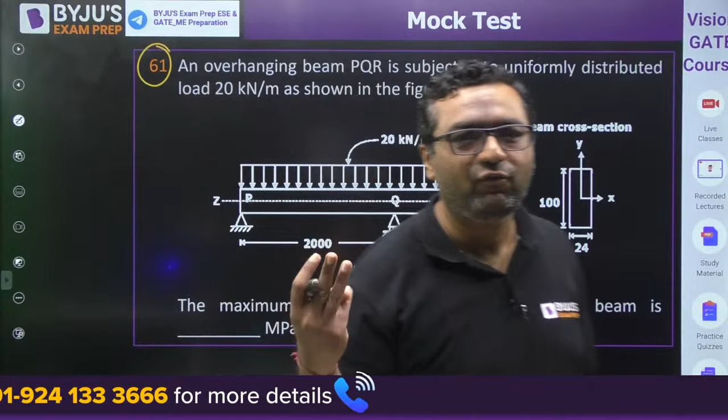So guys, moving to the next question, question number 61. 4 more questions after this. Out of 4, 3 are from fluid mechanics, 1 is from PCM.

This is the case of a beam where we have a UDL of 20 kilonewton per meter. This is 2000, this is 1000, given. This is width, this is depth, given. The maximum bending stress developed in the beam, you need to find out. For that, you need to find out the maximum bending moment.

If I do the calculation, you can see one section will be between P and Q, and the other section will be between Q and R. So first, you need to find out the support reactions RP and RQ. If you get that, I can tell you how to solve this question. First, find the value of RP and RQ.

As it's an overhanging beam, you need to use the equations. Summation Fx equals 0 gives no equation. Summation Fy equals 0 gives RP plus RQ. Total load is 20 kilonewton for a length of 3 meters, so it's 20 into 3. Then you take summation moment at P or Q equal to 0.

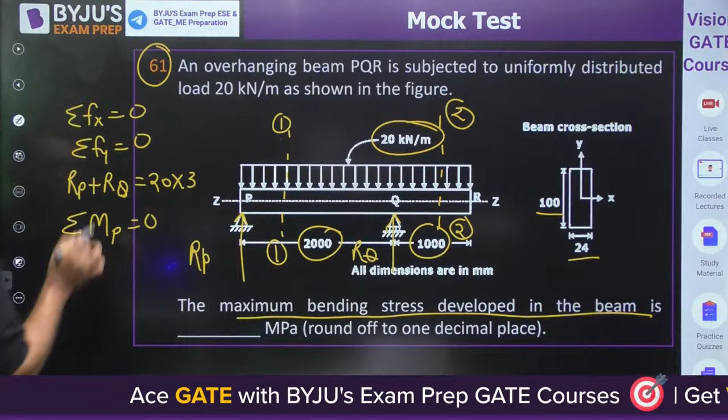When you take moment at P equal to 0, what do you get? UDL is 20 into 3 into 1.5, this creates a clockwise moment, and it equals RQ into 2. This gives you the value of RQ, and then you can find RP.

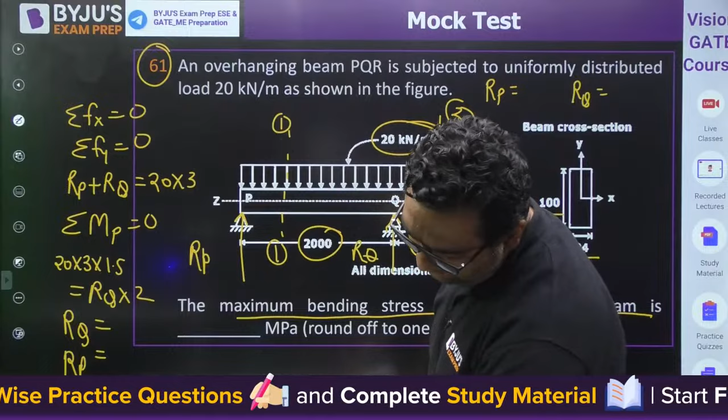Can you tell me the value of RP and RQ first? If you give the value, I'll tell you the rest. I feel we will be getting RP as 15 and RQ as 45. Are you getting it?

Okay, you have given the answer. Very good, Vineet, you are saying 250 MPa and your answer is correct. So we got RP as 15, RQ as 45.

Now we will write the equation for the first section and the second section. The first section equation: summation M1 equals RP into X minus W into X by 2. Second equation is minus W into X by 2. This first equation is valid from P to Q, and the second equation is valid from R to Q.

You already know the value of RP is 15. So you write 15 into X minus W, which is 20, into X square by 2. So you will be having 15X minus 10X square.

The total length is 2 meters from P to Q. When you put X equals 0, you get bending moment at P to be 0. This equation is the bending moment: 15X minus 10X square.

Bending moment is maximum when dM by dX equals 0. That gives 15 minus 20X, so X equals 15 by 20, which equals 0.75. Putting X equals 0.75, you get the maximum bending moment in this span, which comes out to be 5.625.

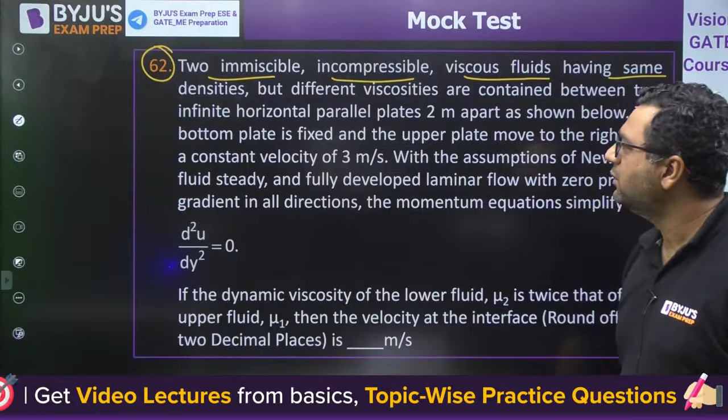So guys, this is question number 62 - 3 more questions after this. Two immiscible, incompressible, viscous fluids having the same densities but different viscosities are contained between two infinite horizontal parallel plates 2 meters apart. There's a figure given for this. The bottom plate is fixed, and the upper plate moves to the right with a constant velocity of 3 meters per second. So you can say this is given as 3 meters per second, and this plate is fixed.

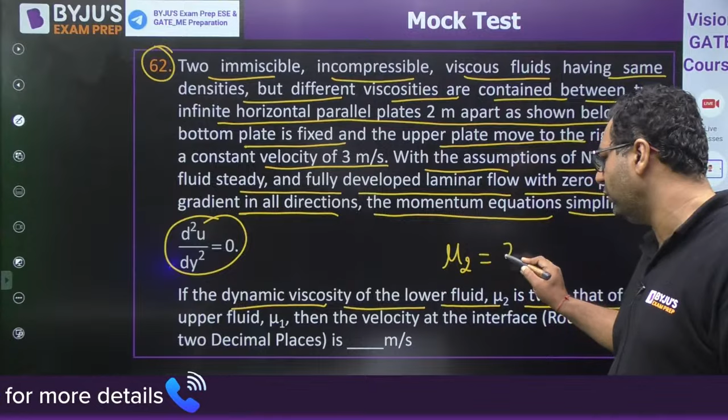With the assumption of Newtonian fluid, steady and fully developed laminar flow with zero pressure gradient in all directions, the momentum equation simplifies to d-square u by dy-square equals 0. If the dynamic viscosity of the lower fluid, mu2, is twice that of the upper fluid mu1, they are asking you the velocity at the interface - here viscosity is mu2, here it's mu1. So can you try this? This is given to you - can you try this? It's a fluid mechanics question.

We are having 3 questions of fluid mechanics, 1 from part CPM. Try this: you can write tau equals mu2 - this is V2, this is V1 - so mu2 V1 upon height h, you can say h is 1 meter. This is tau equals mu2 V1 by h. You can also write it as mu1 into V2 minus V1 divided by h. Since the height is equal on both sides, h will get cancelled because this distance is 1 meter and this distance is also 1 meter.

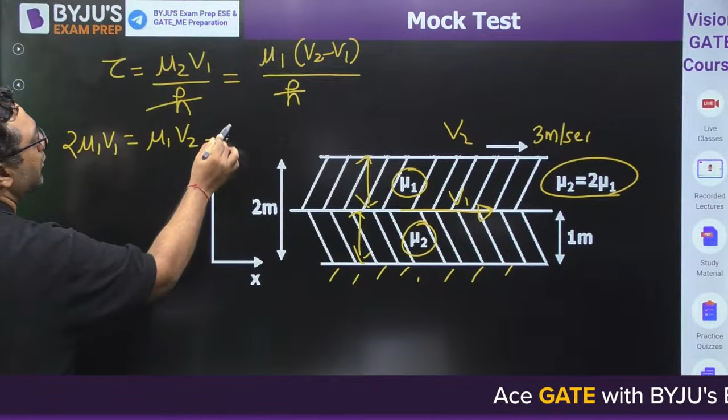Since mu2 is 2 times mu1, so 2 mu1 V1 equals mu1 times V2 minus mu1 V1. So mu1 will cancel out, and you'll get the value of V1. Here V2 equals 3V1. So can you tell me what the final answer would be? V1 will be - this is a 1 mark question of fluid mechanics - 1 meter per second is correct. So the answer for that question is 1, and this is the 1 mark question.

Next question is for 2 marks, using the concept of projectile motion - mechanics and fluid mechanics intermixed together. 2 more questions after this, guys.

A tank open at the top with a water level of 1 meter, as shown in the figure, has a hole at a height of 0.5 meter. A free jet leaves horizontally from the smooth hole. The distance x where the jet strikes the floor is what you need to find out. You can see this is projectile motion, and you know that in the downward direction acceleration will be g. You need to find out the time required for that.

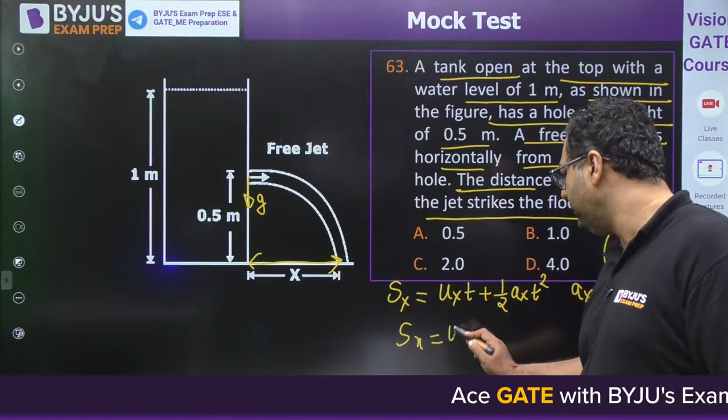If you want to write the equation for Sx, it will be ux times t plus half ax t square. We know ax is 0, so Sx will just be ux times t. I feel they have given that the water level is 1 meter - a tank open at the top with a water level of 1 meter, so this total water level is 1 meter. Solve it, I've given you the hint. You can find ux equals root of 2gh, where this is the h - this will give you the value of ux.

Then if you apply sy equals uy t plus half ay t square, you know ay is minus g and sy is 0.5. Putting in this value, you get the value of time, which comes out to be 0.319 second. Once you get the time as 0.319 second, put it into the ux equation, and this value will come out to be almost 1 meter.

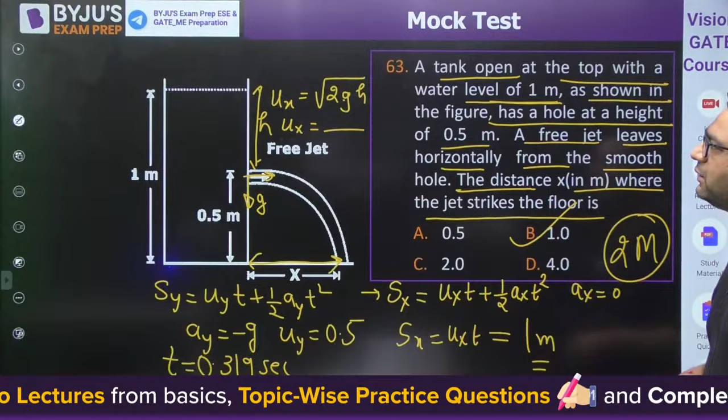1 meter. B is correct. Very good, Vineet. Moving to the second last question of the paper.

2 marks question of fluid mechanics. After that, we have the last question on PERT CPM.

The large vessel shown in the figure contains oil and water. A body is submerged at the interface of oil and water such that 45% of its volume is in oil. So 45% volume is in oil, 55% in water. That is the case given to us. The density of the body in kg per meter cube - you need to find out density.

The specific gravity of oil is given. Density of water is given. Acceleration due to gravity is given. Try to find out, guys. This is NAT once again.

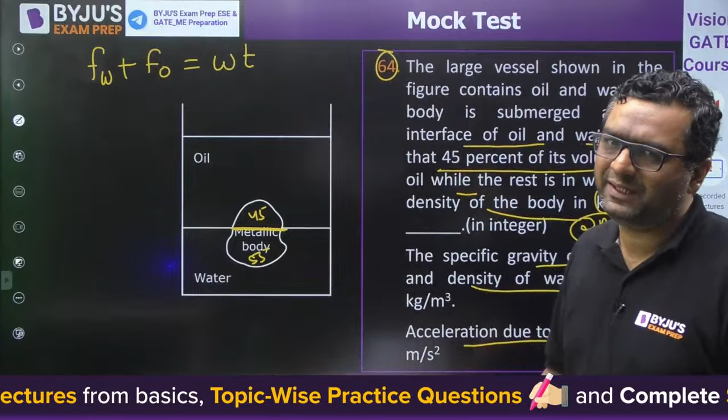You just need to use the equation: buoyancy force of water plus buoyancy force of oil equals the weight. You know buoyancy force equals the weight of volume displaced. So rho of water, volume of body, G, plus rho of oil, volume of body, G, equals the weight of the body. You can assume the weight to be W.

Okay, try to solve it. They have already mentioned all the data in front of you. 865 you are getting - that is correct. 865 you will be getting as the density of the body. 865 kg per meter cube is correct.

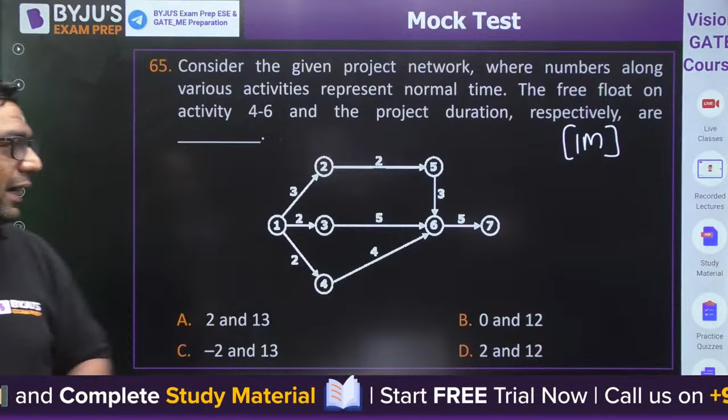Last question from PERT CPM, guys. This is a 1 mark question. We have completed 99 marks. This is the last question for 1 mark. Here they are asking you the project duration, and for this particular activity 4-6 they are asking you the free float.

So for that we will use the forward and backward pass computation. I hope everybody would be aware of that - forward and backward pass computation.

So you will be starting with 0. After 3 it will be 3, after 2 it will be 5. Here after 2 it is 2. 2 plus 5, okay here there are some options. This is 2, so 2 plus 5 is 7. This is 5 plus 3 is 8. And 2 plus 4 is 6. So this is 6, this is 7, this is 8.

So we will write the maximum one. 8 and 5 are 13. So first of all, these two options are not correct. Either this or this will be correct. From that, I feel you can answer, because float cannot be negative. The answer will be A.

Float cannot be negative, answer will be A. But still, if you want to calculate, I will tell you in the backward pass computation. This is 13, this is 5, this is 3, this is 0. This will be the critical path. But if you see here, 13 minus 5 is 8. 8 minus 5 is 3. 8 minus 4 is 4.

If you see activity 4-6, you know how to find out the total float. It will be 8 minus 2 minus 4, it is 2. Free float is total float minus head event slack. Head event slack is 0. So answer will be 2 only. So 2 and 13 is the answer. A would be the right answer.